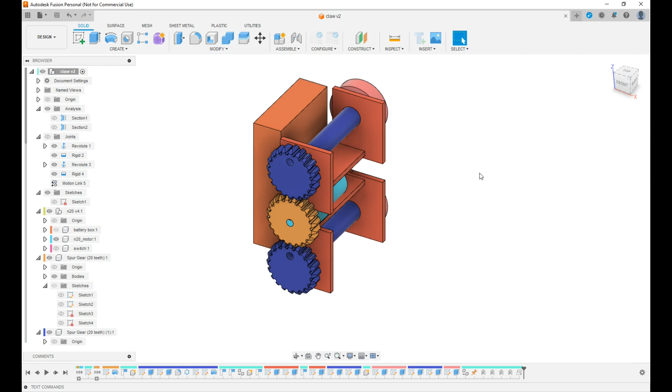This is the second video on building this clawfoot walker, designing it in Fusion. Here's where we ended up last time. I'm going to start building the legs now. We'll do them on this front side. I'm going to make a new component and call it leg.

Not sure if it's a left or right one yet. We'll create a sketch on the face of this gear. Let's project in and see. I want that hole for sure, and this hole down here.

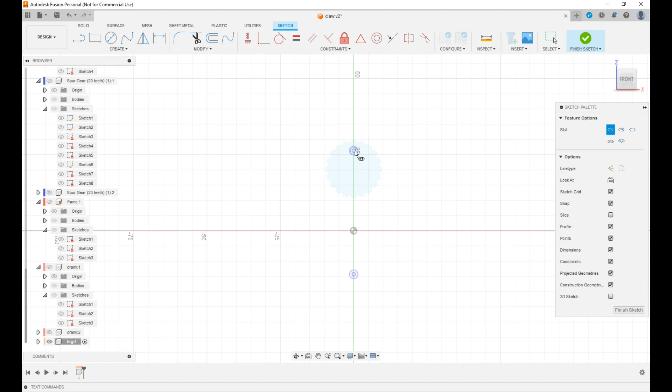Now I'm going to isolate it for now. We will draw a... that's not what I want. Let's create a slot. We'll make it a center to center slot. This is just an easy way of making a rounded thing.

We'll dimension that as, I don't know, 6. Sounds good. Now we'll draw a line off that. I think maybe we'll draw the leg where it runs out this way. So let's draw a line from here down to here, down to here.

We're going to try to shift it, since the battery's going to be in the front over here. I'm going to try to shift this leg over so that the center of gravity is more lined up with it.

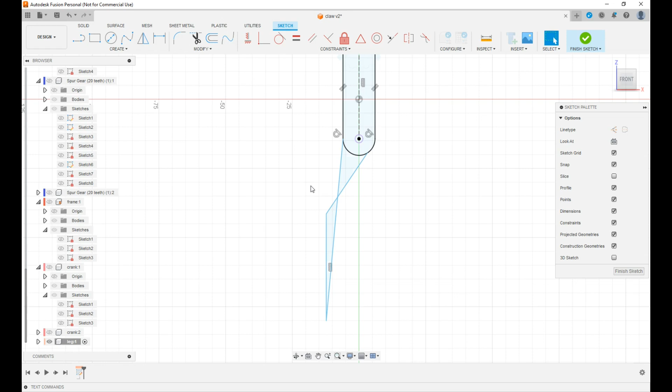I'm going to draw a line from here. Now what did I do there? Got to talking and forgot what I was doing. I'll draw a line from here to here, down to here. Let's...

Dimension those to, let's keep them the same as here. Radius is 6. So it's 12, I believe. I've got some constraints somewhere. I don't.

Let's make those tangent. I think I've got a constraint here I don't want. Let's just delete that line. Start over again.

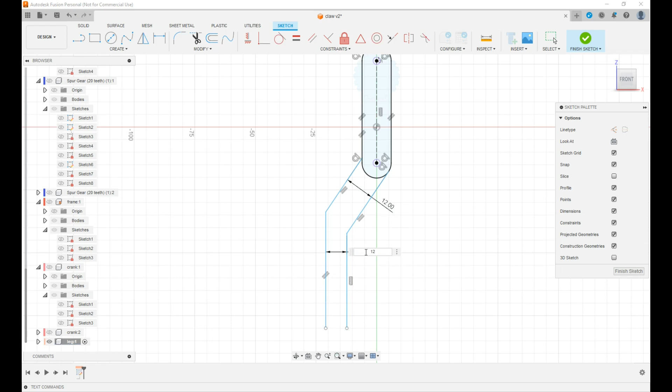Go up here, make these parallel. Haven't really thought out this geometry very well yet. Dimension this to 12. Same here. Might be a little on the big side, but we can always change that.

It's dimension from here to here, 20, 25, and this line will dimension as, I don't know, 40. We'll see what this looks like.

Close off this at the end. Perpendicular constraint from here to here. See where we're not... okay, we can set an angle from here to here. Let's make that, I don't know, 140 looks about right.

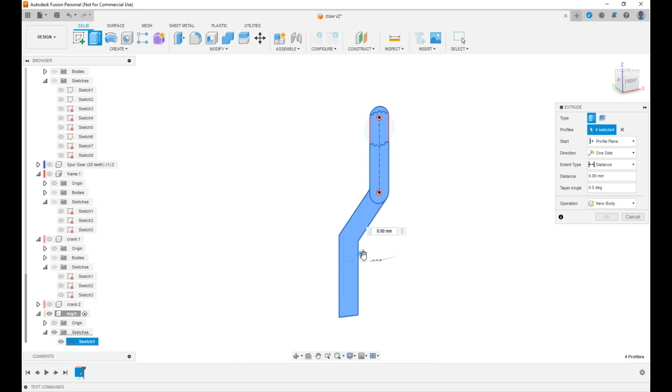Let's go over to this leg and see if the sketch is constrained. It is. So let's extrude all that, this way, I don't know, 6 millimeter. No, let's just go 5.

We can change that too later. Let's unisolate that and see what it looks like. Might have got it too far out. We can just go in here and edit that. 140.

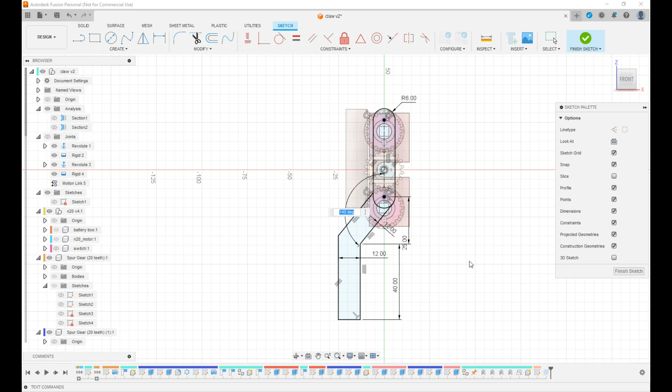Trying to decide how it's constrained. Let's make that 160 and see what it looks like. Yeah, that looks better.

Now I want this to move with this, so we're going to try to make that happen. We're up at our top level, assemble, as-built joint. We're going to make this a revolute joint, this component to this component. Snap.

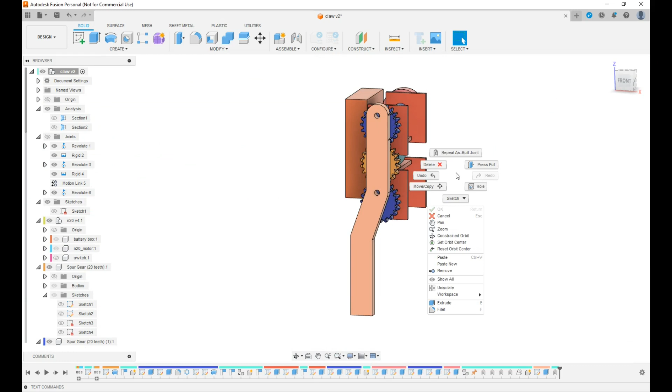That's where I want it, right there. That looks right. I'm going to repeat that, this component to this component. I'm going to try to get in there, same thing, and let's see if this works. Sometimes it does and sometimes it doesn't.

Seems to work. Let's go to joints and animate joint relationships. So that's what we're going for. That's the motion we want. Hit escape to get out of that. Revert position.

I want to make sure those stay lined up so that everything is at the end of its stroke, so I know where I can put things.

Let's make a foot for it. The reason I'm going to make them separate is in case I want to change the design of a foot, I don't have to reprint this part again, or if I want to change the design of a leg, I can just screw them together. So new component, call it a foot.

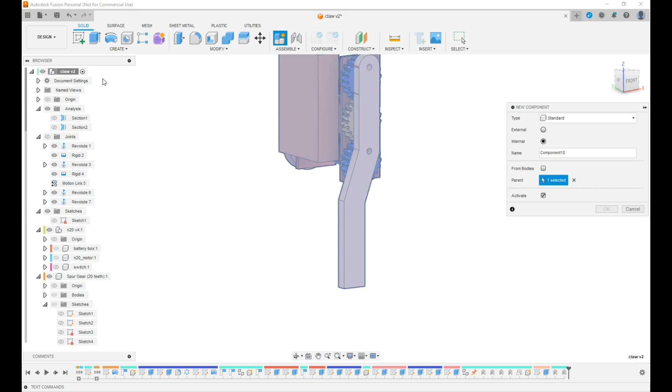We will create a sketch right here, project in that geometry. Now let's see, I want to do this. Let's just do it with lines, from here to here, to here.

Fix some of this stuff with constraints. Probably want to move that up a little. Whoa.

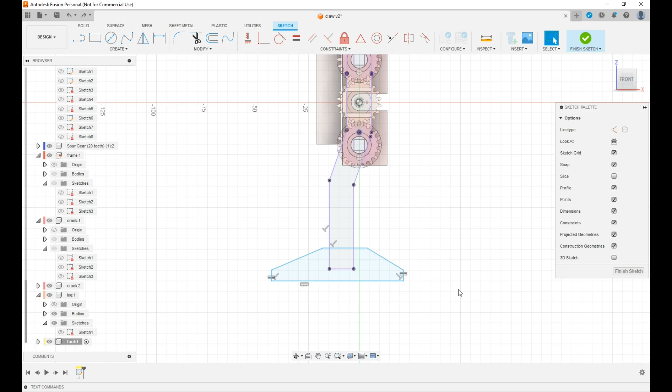I'm just kind of eyeballing it for now. We'll put some dimensions on there in a second. Let's make those two equal. Yeah, we will make... let's make these two equal too. No, that's not what I wanted to do.

We're going to make a line from here, center here, to center of here. I'm going to make that a construction line, and then we're going to make it vertical. That'll constrain that, and then we can set that to, I don't know, 3. Sounds good.

Make this 3 also. And from here to here we'll make 12. I'm just making this stuff up. Let's dimension this angle here. 135. In other words, 45.

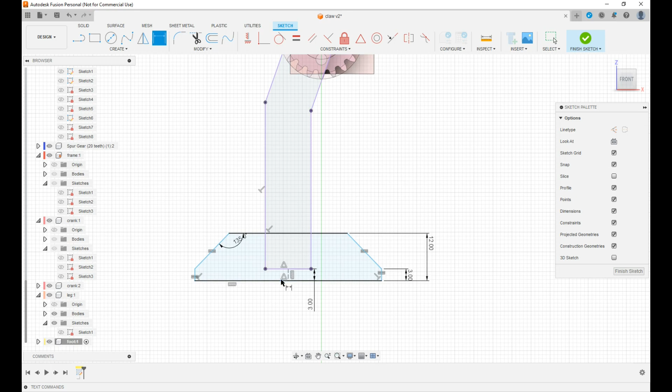What have I not got dimensioned? Probably this length here will bring it under control. 50. I'm looking at a scale over here, see if that's about what I... Yeah, let's go with 50. Can always change this, this is easy to change.

Let's go down here to our foot and see if it's constrained. It is. So first of all, let's extrude this out. Let's make it 2 millimeters and that. Okay.

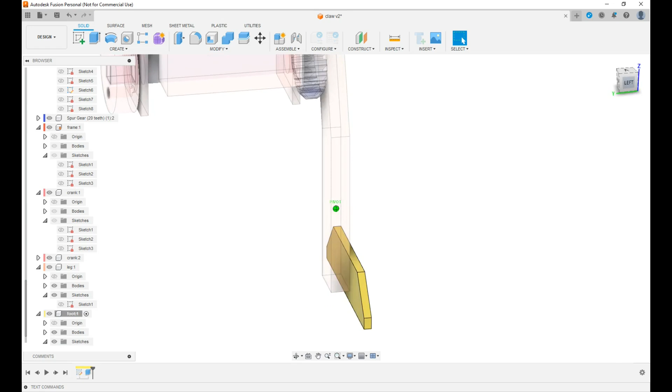Let's go into our sketch again. Let's offset this to give a little clearance. Point 2.

Turn our sketch back on. Now let's extrude this out. Distance, let's just go here, 5.2. Let's make it 5.4. Whoops, need a decimal point in there. Join.

This might be a little thick, but we'll see. Turn that sketch off, it's in the way. See.

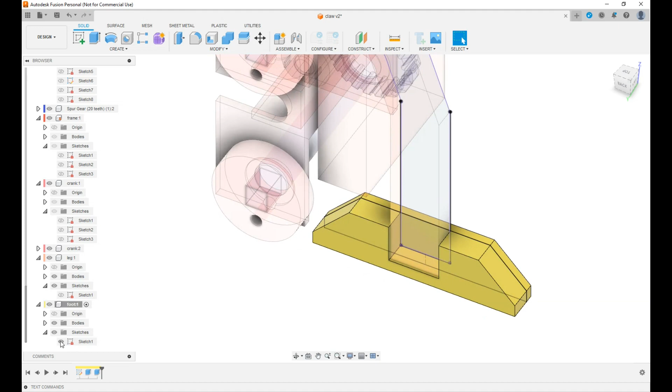So the idea is to screw this to this. So we need some holes. There's a hole in there. We'll create a sketch on there. Project in this. Do a circle.

This is going to be the through hole, so dimension this to screw clearance. Need to lock that in place.

We'll want it off the center here to here. Move a line, hit X to make it a construction line, just because we'll dimension it to 4.5. That looks reasonable. These aren't critical at all. We need to make that horizontal. Now we've got a lock. Okay.

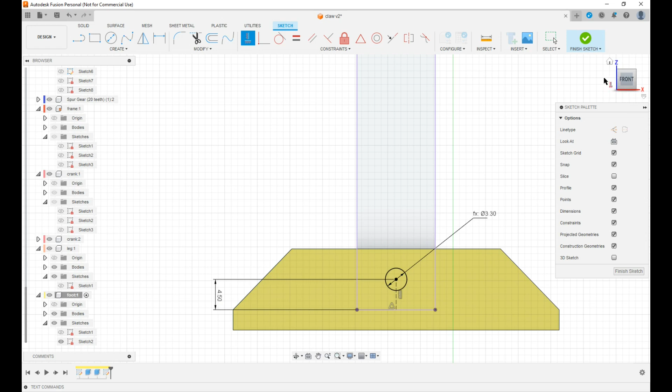Now we can extrude that hole. Distance to this object. Okay, now I want to go back up to the leg. I want to put the hole in it. Create a sketch on here.

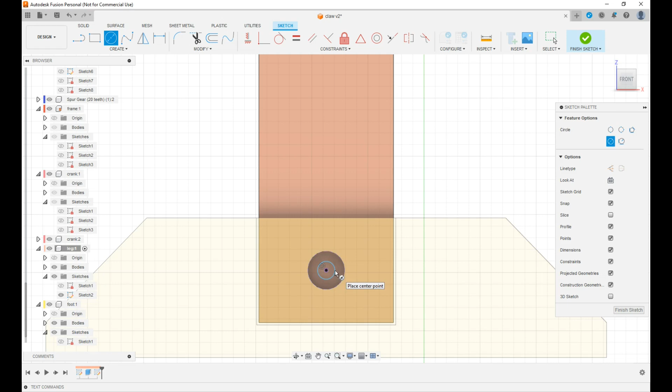Should be 2.9, and it is. Extrude that all the way through. We can see, make sure we're not cutting anything but our leg. Okay, let's go back up to the top.

I like to kind of look at the whole thing every once in a while, see if I'm doing anything like what I intend to do. This foot may not be big enough. We'll see.

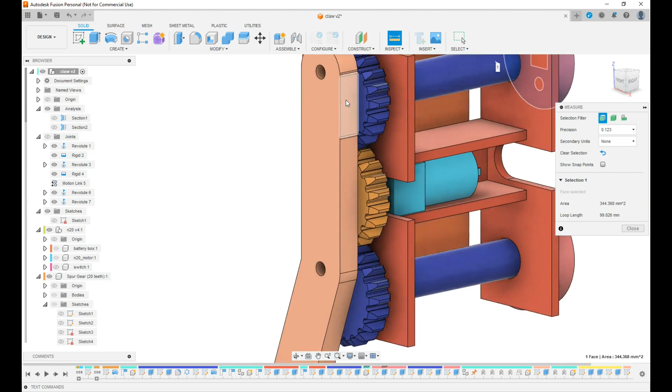Let's go back to working on our foot. Let's figure out how wide this is going to be. Inspect. From here to here. What in the world have I done there? From here to here, 56 millimeters. Let's go down here, activate that component, our foot component.

Create a sketch here. We're going to make the little things that stick out and extend over past the middle, projecting this geometry. Let's just make them square for now. A line from here and then down to here. Same over here.

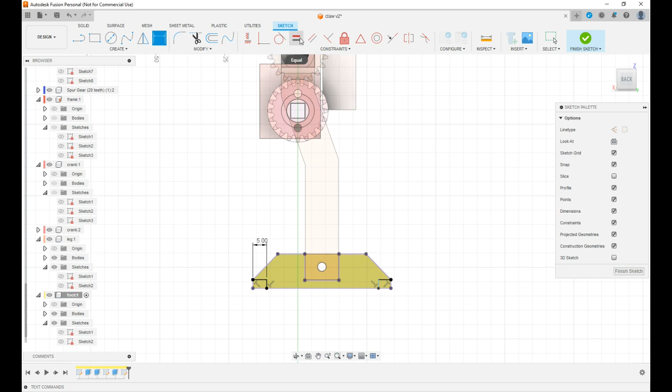I don't think these are big enough, but we'll see. Let's make it 6. No, make it 5. And we'll make this one equal to this one. Alright, now we're going to extrude.

I've already forgot how wide it was. Let's just do it this way. Somewhere over here past center. Yeah, let's make that 37. And 38. No, 36.

Let's see what this all looks like now. Let's tie this to the leg. So let's assemble as built joint, rigid, this component to this component. Now let's go up to our, and animate our joint and see what it looks like.

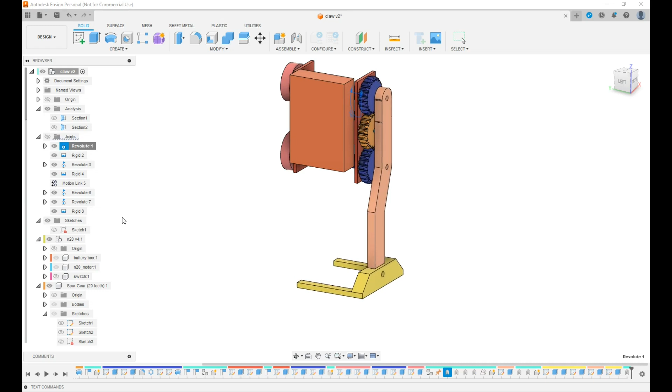Well, we'll see. Hit escape. Now we need to make copies of these for this side so we can see if they're overlapping and hitting.

Now, this one's flat on both sides, so we could just make an exact copy of it and move it over here and it would work just fine. We're going to have to mirror this one though, and that creates some problems I'll talk about in a second. But if this is flat and if we just move this over to this side, it'll work. If we mirror it and we make changes to this, it's not going to reflect our mirror unless we go back in the timeline before the mirror and make the changes.

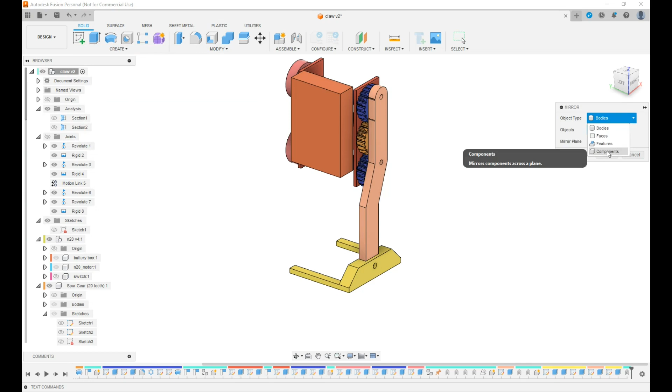So let's try that. We'll go that route anyway. Up at our top level, modify, create, mirror. We're going to mirror a component. This component, mirror plane. Now, before I do that, let's do this. Let's create a mid-plane so it'll come out in the right place. We're going to make a plane between here and here.

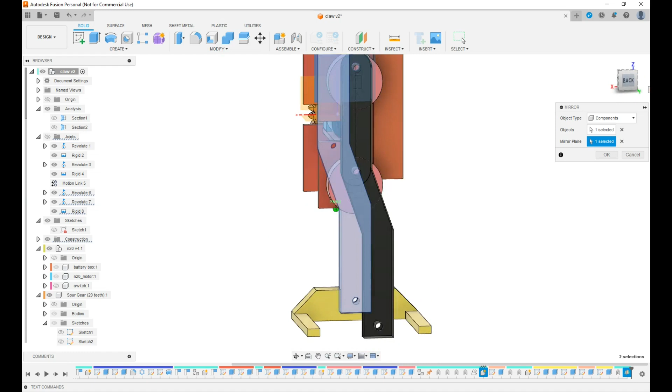Now we're going to create our mirror component. Select the object, this one, the mirror plane, that. Okay. Now we need to move this down. What is it? We need to move it down to our stroke times 2, 12, or just our stroke times 2 so it'll line up with those holes. So let's try to do that. This right here.

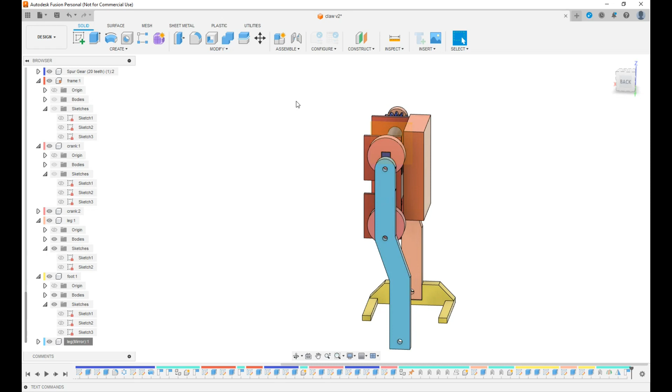Move copy. We don't want to copy, we just want to translate straight down 12 millimeters. Hopefully that'll work. We'll know here in a second. Capture position. Now I want to make a joint between this and these two cranks or joints. Assemble as built joint. This to this. Revolute. Snap. Right there. That looks right. Repeat, this to this. Here. That looks right.

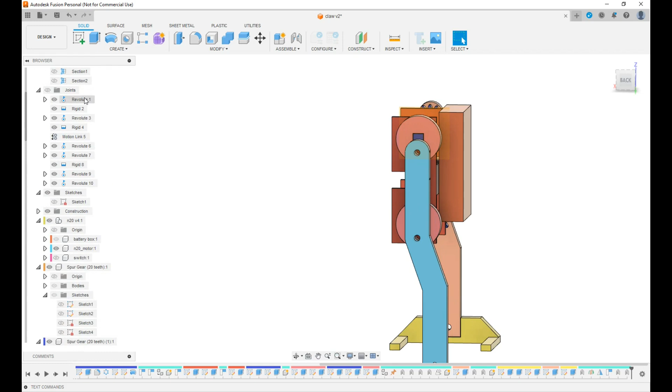Here's a moment of truth. Is it going to lock up on us? Nope. Revert position. Let's go back up here to the top to our joints and animate the joint relationships. So far, so good. Hit escape to stop that. Now we're going to mirror this. We're going to have to do, we'll try it.

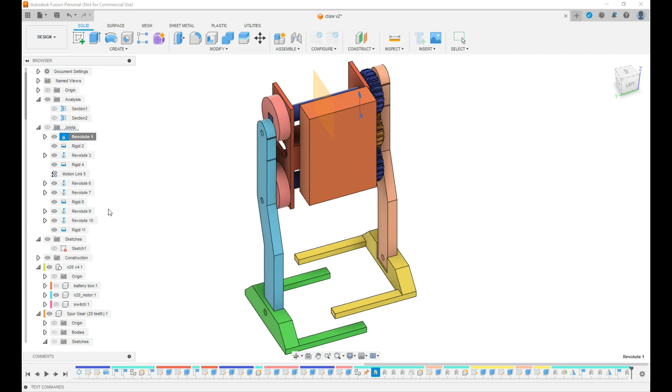Create mirror components, select the object, that foot, select the mirror plane, that mid plane we just did. Now I think if I move this down the same as I did the other, 12, it'll line up right. Hope. Move copy, translate, 12. We'll capture that position. Now we'll create an assemble as built joint, rigid, this one to this one. Now we'll go up and animate joint relationships. I think we're clearing. That would be good. Could even make things bigger.

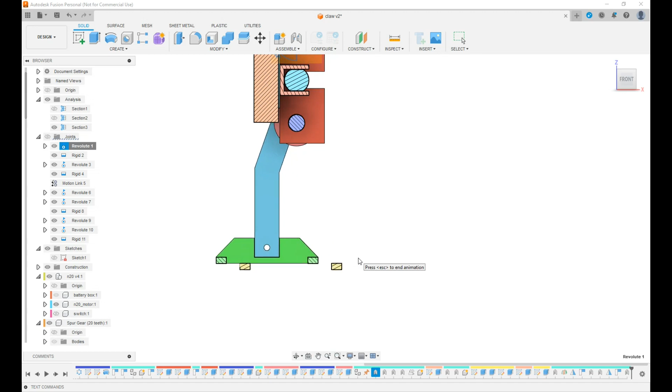If you really want to know, we can inspect section analysis and run that in like that. Okay. Now we can animate that joint. We can see them rotating around each other. Looks like we have plenty of clearance. These posts are what we're worried about. Could make them bigger, which would probably be a good thing. Try doing that.

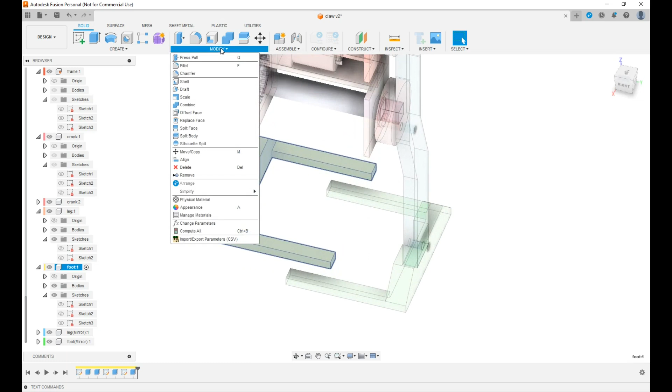Now, unlike these gears up here that are just copies of one another, this one and this one, because we used a mirror to create these, if I go in and change this, it's not going to reflect on this one, or it never has in the past. We'll try it, see. See, it's this one that I created first. Go down here and let's make a slight change and see what happens. I don't know, let's put a chamfer on it. That's an easy thing to change. Let's just put this chamfer on here.

Okay. Go back up to the top. Make sure we're at the end of our timeline, and you can see this did not reflect onto this one. That's really not what we want in this case, because they're going to be identical, just mirrors. So let's undo that. Control Z or whatever. What we need to do is move the timeline back before we did the mirror, and then edit it. So, see, here's the mirror where we mirrored it. This is a component right there.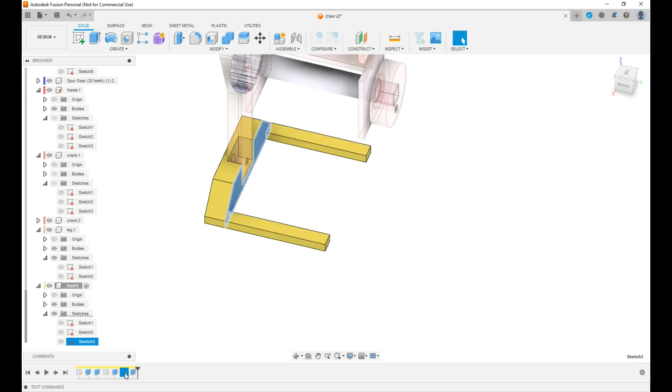So, what's this? Extrude, where we did that. Let's right click, roll history marker to here. Now let's activate that component. This one. You can see the other one's not showing up because it's in the timeline. It hasn't been created yet. Kind of a back to the future thing. Now let's make those bigger. Let's make them 6. How thick were they? 3mm by 6mm. Yeah, that'll work.

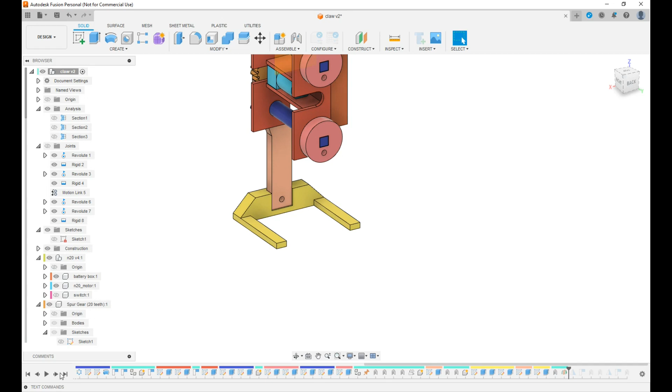Now, if we get out of here, go back up to the top. I'll try to do this so that it makes sense, because it took me a long time to figure out what was going on as far as this stuff goes. I'll just play this back one at a time. See, joint, mirror plane. That's where we created our mirror, right there. So we were before that. So hopefully these are going to be the same length, 6 and 6. Yeah, that worked. Gets confusing.

Let's animate that again, just for fun. Oh, I wanted to turn on my section analysis, so I can make sure we're not interfering.

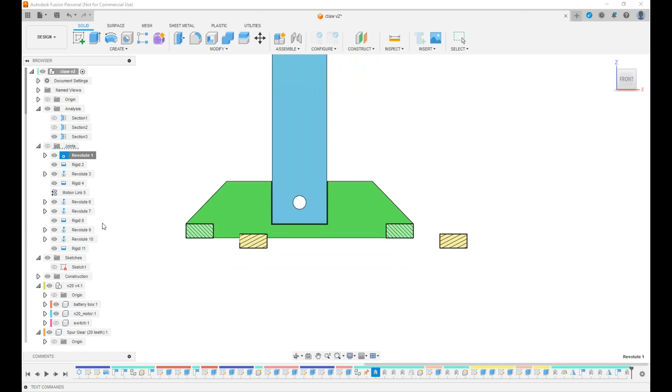That looks good. So that's the basis of what we're doing. I have a basic idea of what we're doing here: these clawfoots, making these revolve around each other. Turn off that section analysis. Now I want to get something I can actually print.

So what we need to do, we need a way of holding that motor in. So to finish this part of it, we want to make a motor mount clamp or something to hold that motor down, and a way of mounting this battery, and a switch. I want to do those 3 things. This is 27 minutes in.

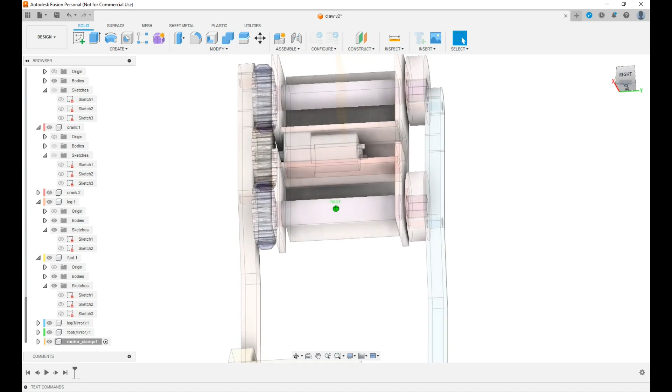So let's go up here. New component. Let's call it motor clamp. I want to do this. I think I'll do it the way I did it on my last one. I'll just make a little thing that pops down from the top and gets screwed through here. It just holds it that way. We will try that.

So, first of all, let's go back up out of that component. We want to extend these walls up, so we got a little place for our clamp to feed down into, and then we'll put holes in the side of those walls to hold it in. So what's that? Yeah, that's for construction for a mirror. I'll turn that off. Gets kind of confusing.

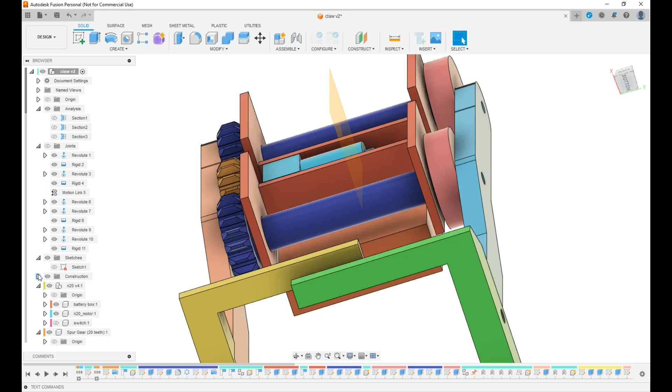There's many ways to do this in Fusion. We can go back in our timeline to the sketch we created this with, or we can just grab these up right now and extrude them up to here. So let's get them back into our frame. I'm just going to do the easy thing. Extrude. We're going to extrude distance to object. Actually, don't really need to go that far though. So let's just go distance. We know that's 7.8 millimeters.

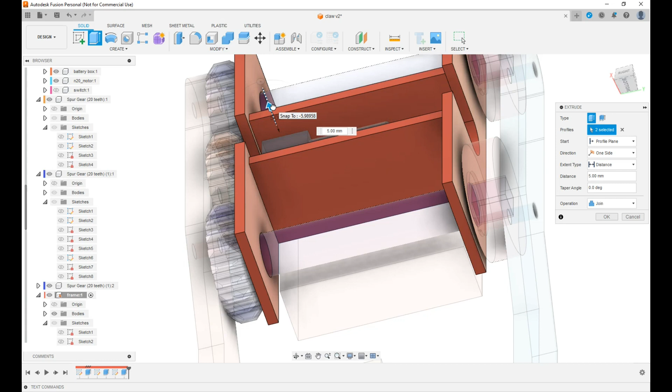Let's just go 5 millimeters. We'll leave it down a little bit. I think we can still get our screws in there. Okay. Let's isolate that frame. I want to make some holes through there. I want to bring that motor back in though. I'm going to make some holes in here for some screws to go through. Right here. Create a sketch on that. Don't like the way that looks.

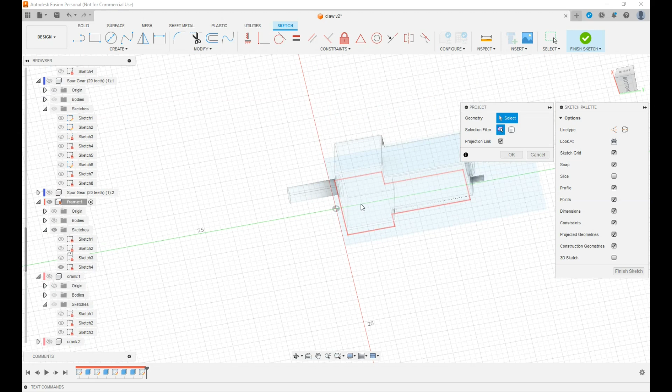We're going to project in, let's see, that side of that motor. Turn off this body. I'll project that in. Bring the body back. That'll work. Now we're going to put 2 screws right here. I'm going to project in this geometry too. Just put a couple of circles here. Dimension them to be, these are going to be through clearance. They're going to be equal.

I'm going to dimension them from. Now let's do it different. We'll select them both. Make them horizontal vertical to one another. From here we're going to dimension. May have to move that wall up a little more. Let's make them 3. We will do that in a minute.

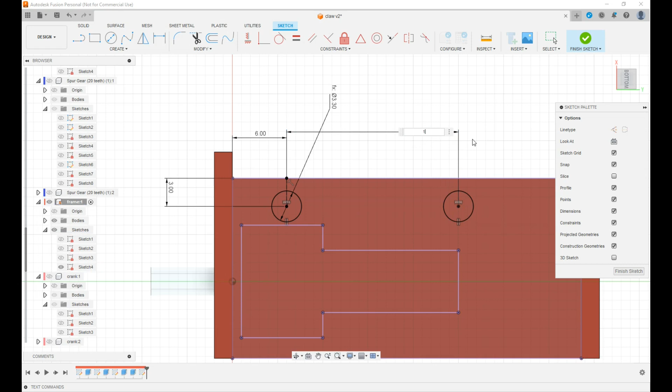We'll dimension them from this edge right here, and from here to here. 6 sounds good. And we'll just dimension them from one another. Let's make that 8. No, let's make it 16. Yeah. Okay. Now we can extrude these all the way through to the other side. Cut. Make sure we're not cutting anything but the frame. Okay.

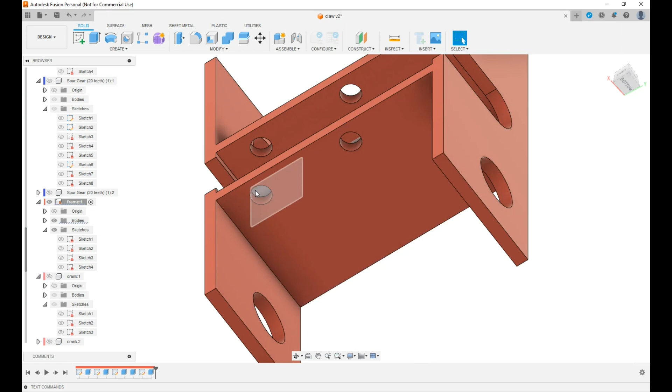Oh, I'm just going to go ahead and change this so it extrudes all the way up to here. Should have done that originally. You can see it moved. Well, the sketch didn't move, but our holes moved with those walls moving. Something looked funny. No, that's all right. So that's our holes we're going to use to hold our clamp in with. So let's go back down to the clamp.

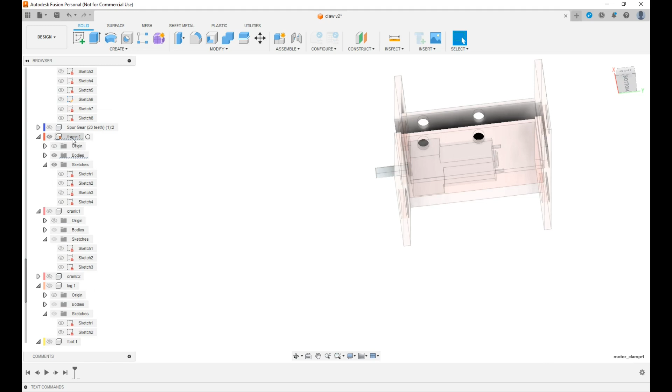Trying to decide what I got isolated. I don't want to lose track of that. The frame. And we'll go down and isolate the motor clamp. Whoops. Yeah, now I want to turn that frame back on. And the motor.

Okay. We will make a sketch on this face. We're going to slice it so we get down to there. Yeah, that might not be a good idea. We'll project in that line right there. Project. That is one end of our motor. Also want to project in. Let's project in.

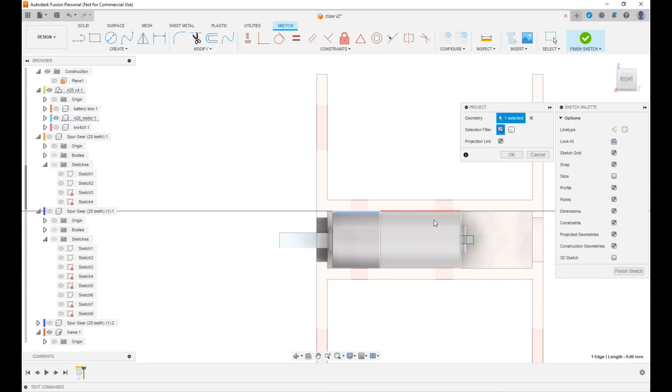That line. No, this line down here is what I really want. I want to know where the end, or this one. I want to know where the end of the motor is. That one. Now I want to slice it with my other line. Go? Oh, project that line. Now I want to slice it.

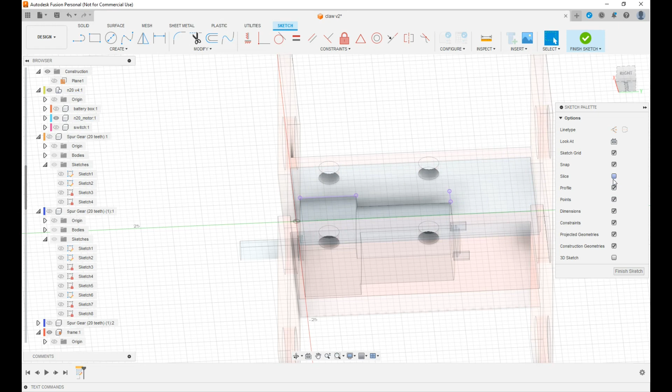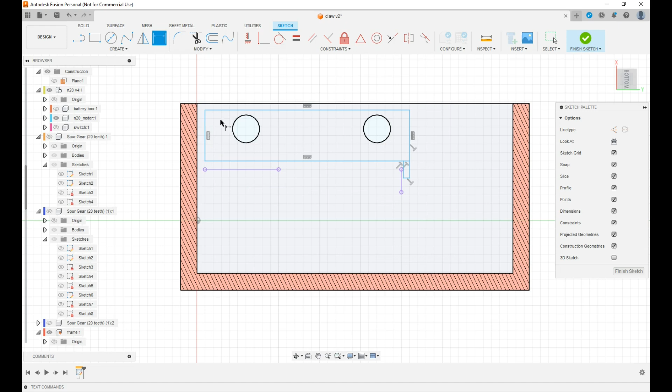Let's just make it a rectangle. From here over to here. We'll make a little lip that goes down like this. Trying to get this motor captured. Let's dimension this. Let's make it 26 long. This will be basically an offset for our clearance. So make this 0.2.

We'll dimension this from here. I don't know, 0.6 I guess. From here to here. Let's make it what we could do. Delete that dimension. Let's project in this line here. And just make those coincident. That didn't work. Well, we'll make this point and this point horizontal, vertical. That'll work.

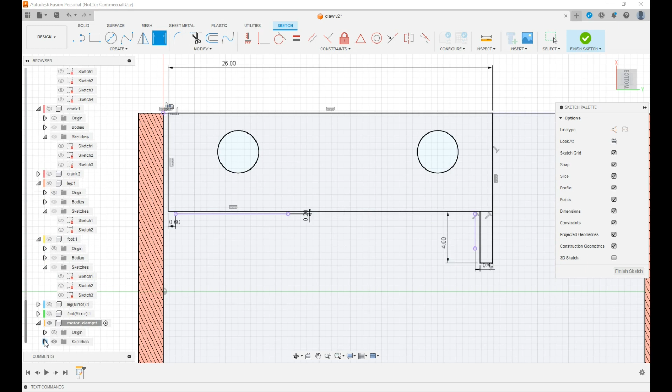Dimension from here to here. Let's make that 0.4. Give a little slop. And this line here, I don't know, 4. We'll see what this looks like in just a minute. See where we're at on our sketch. It's fully constrained. Finish sketch. Let's extrude it from there.

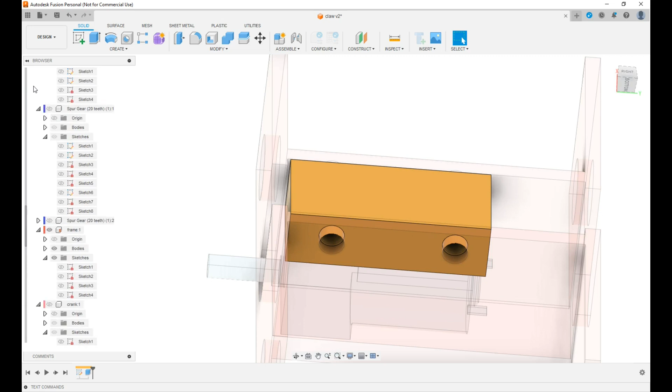We can go to object, pick that object, just use an offset, minus 0.4. This doesn't have to be tight. New body, okay. Now we got a block. We'll take some of that plastic out of there in a minute. Let's see what this looks like. I think I'm going in the right direction, but I could be wrong. I'm making this all up as I go. Well, my offset wasn't in the right direction. I see that.

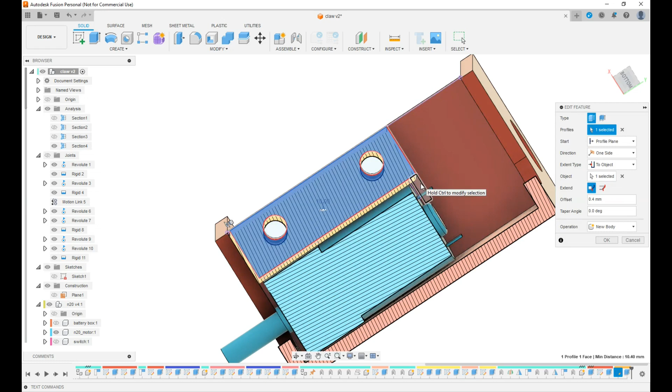Let's do a section analysis and see what that's doing. Well, let's leave that alone. Go back here to the extrude that created that. We forgot to add that in. I can see I'm interfering with my motor. I should have turned that motor 90 degrees, I see now. Oh well. We'll edit that sketch.

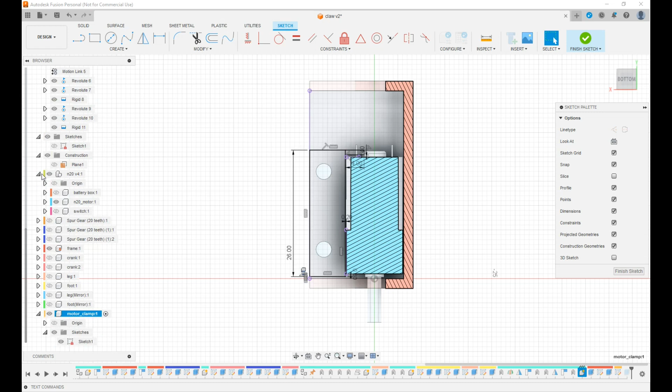Sometimes it's hard to get a sketch dimension. Some of that stuff interfering. Let's see, what am I working on? Let's turn off that. Got too many things going on here. Need to close some of these down. I'm going to turn off that motor, I think, so I can edit that sketch, make it 2. Now I want to bring my motor back. I think that'll work.

What you can do when you're having trouble like that, go down here, do your sketch. If I can get to it, right click, show dimension. Well, that's not what I wanted to do. Usually you can get in there and edit that dimension then. Well, let's turn the motor off. Now we can do it. Now you can double click on the dimension, change it to 1.6. Okay.

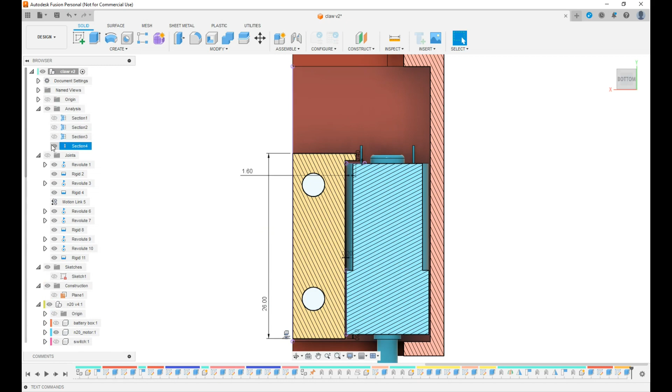I think I'm about to get lost here. Let's turn off that section. Well, let's look at it closer. What's that dimension? 1.65. Those holes are too big. Let's go back into our motor clamp. Turn off that motor. Turn off the frame. Edit the sketch. Oh, I didn't put those into a sketch. That's why. Let's bring the frame back up and project in those holes.

My dog's barking at something.

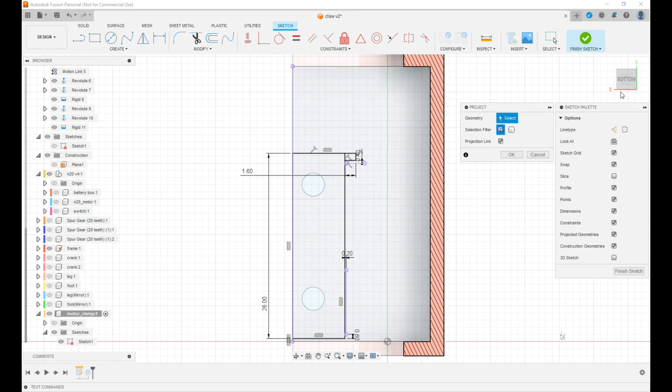For some reason that didn't work. Trying to project in those holes. I think it's actually my sketch that's in the way. There we go. Now I want to make them construction. Circle. Now I know you can use the hole command for this, but I'm just not used to it. Dimension these to screw. These are going to be what it threads into. 2.9, enter, and we'll make them equal.

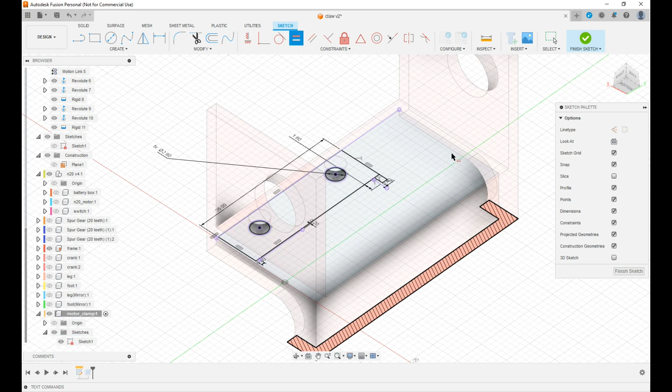Now I'll go back to my extrude. What am I extruding? This. I think I'm picking up the profile off the frame when I do that. Is the frame still on? Yeah. Alright. Let's try this. Get rid of all those.

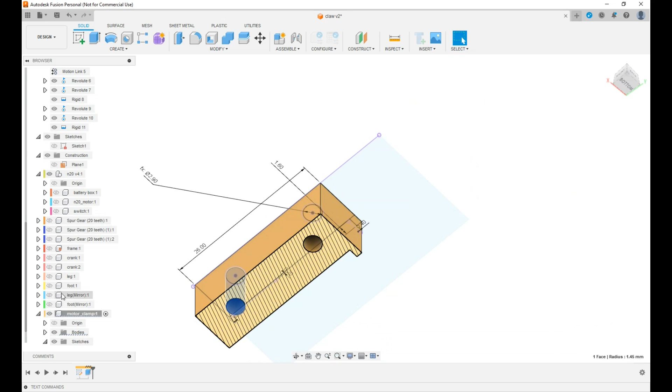But it's still the wrong size. What am I doing here? Sometimes selecting things can be a challenge. Now we're right size, 1.45. Well, that didn't go too smoothly. I'll go down and turn that sketch and hide dimensions, and turn the sketch off so it's not showing up.

So where's our motor? So there's our motor. There's our little block that's going to clamp down on it. That was way more trouble than I thought it was going to be. Let's turn off the sketch, or I mean the section analysis. So there it is. So we're going to run screws through here and they'll thread into this and hold that block in place, and that'll clamp the motor down.

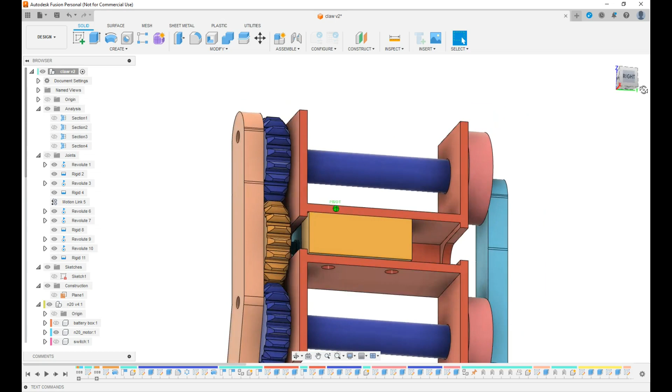It could be better constrained. If the motor had set back a little more, I could have put a lip on this end, and that would have kept it from sliding a little bit. But I think this will work. If nothing else, we could go in there and just make the frame so it can't slide. That can be modified later.

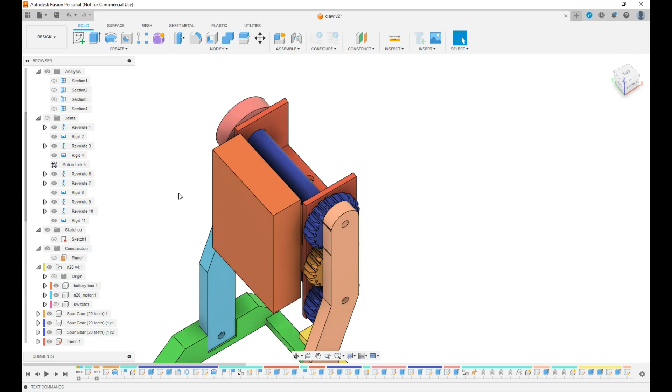Okay, now we got to put a place for the battery and the switch. Where's the battery at? Battery box. To that, we're just going to put a plate on here, and I'll double side tape it for now. So, frame. I'm going to isolate it. Create a sketch on it. Project all that in. And we'll just draw some lines to close it up.

And extrude, does it matter which way I extrude it? We'll go out for now. Only like 1.6, doesn't have to be very thick. This will be the side it'll print from. Now where am I going to put the switch?

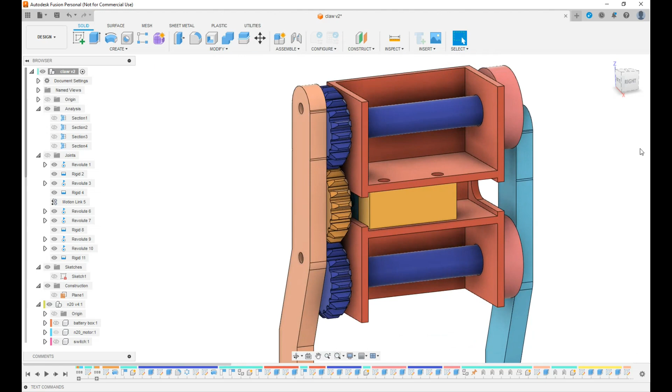Our battery's going to be over here. I need to move it a little, but that's irrelevant. Just put the switch right here. I can make a mount. I believe it'll fit right in there. Don't think that'll be a problem. So we'll put the switch where it sticks out the other side from here. Let's go back into our frame. Let's isolate it. Where's the switch at?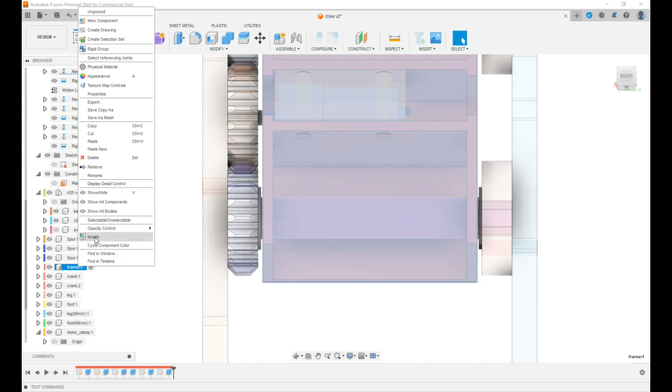Let's see if we can't move it into place. So, move copy. No, we want to be at the top level before we do any move copying. I don't know if it matters or not, but I want to be there. Move copy. First thing I want to do, we'll do a free move. We're just going to rotate it 90 degrees.

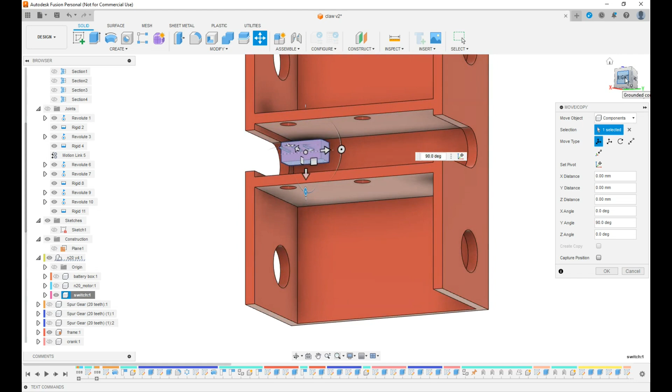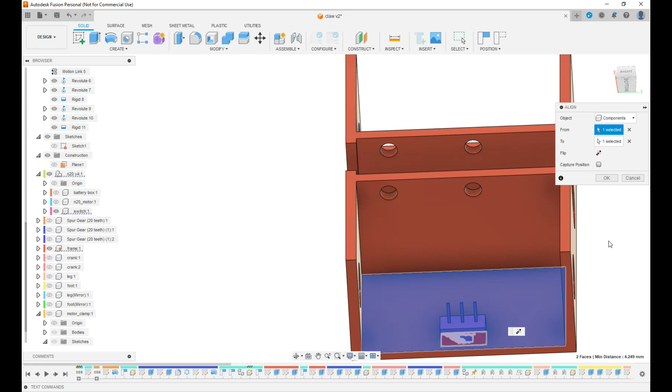Okay. Now we're going to translation. I think this is the down side. Yeah, that's down. We'll put it right smack dab in the middle. We're pretty close to it. That's close enough. I'll try to use the align tool. I hardly ever use it. To put this face on this face. Did that work? Yeah. Okay.

Now I can check to see if we're on center. Let's go ahead and do that. It'll bug me if I don't. We'll measure from here to here, and from here to here. 15. I've already forgot my overall dimension. It's getting late. Yeah, we're the same. So that's where our switch is going to be.

So let's activate the frame. Create a sketch there. I want to capture position for sure. Now we're going to project in. P for project. Those lines. I'm going to hide that switch for a minute, I think. Offset that by chain selection. Offset it by minus 0.2. I think that'll work.

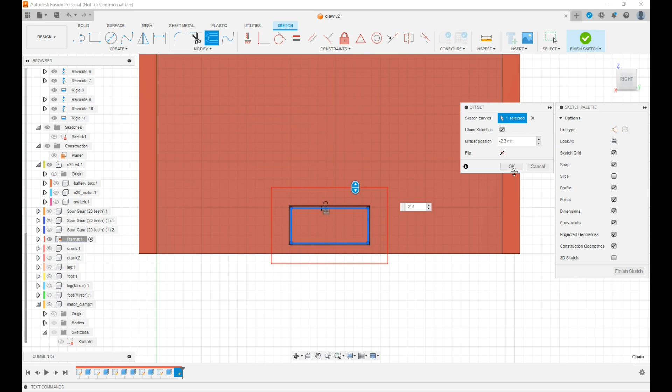Now we're going to offset again, by minus 2.2. Make little walls that are 2 millimeters thick. That's alright. Finish sketch. Guess I got it too close to the edge. Extrude. It's alright. Let's bring that switch back up. See how far I want to extrude it. Four. Sounds good.

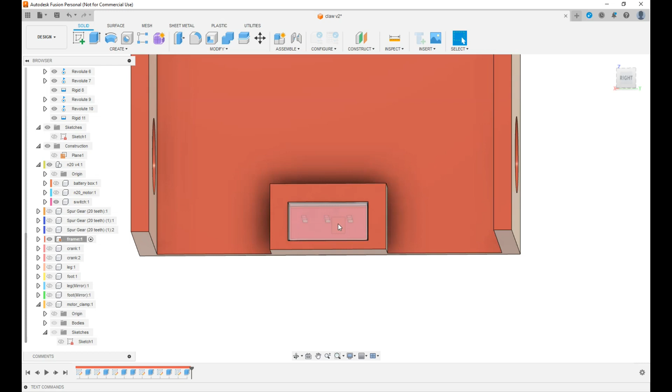Okay, now I want to, my switch. Go down here, create a sketch. I want to make clearance for the little knob on the switch to go through. Project this in. Line. This is so I can find the center, which is the way I do it. There's more than one way of doing it for sure.

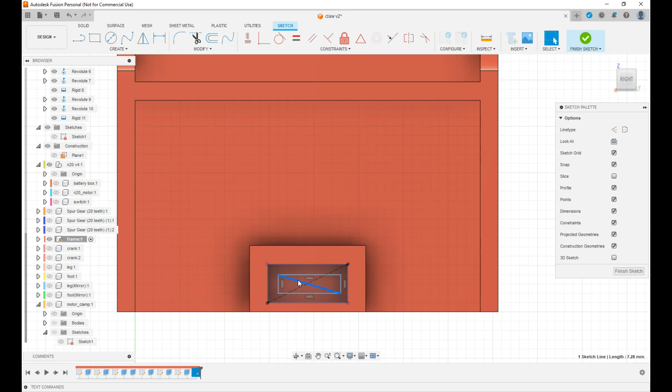X. Now I want to do a rectangle. A line on it, go in the opposite direction. X to make it construction. Now I want to midpoint that to that. That should put them in the center. Now I just need to dimension this. Down there where I can see it. And I've got the switch over here.

Let's see how much slide it's got. Can't remember what I normally use. 4. We'll dimension this. I think 2. I want to get a little. Let's make it 2.5. No need in getting too close. Now we're going to extrude that.

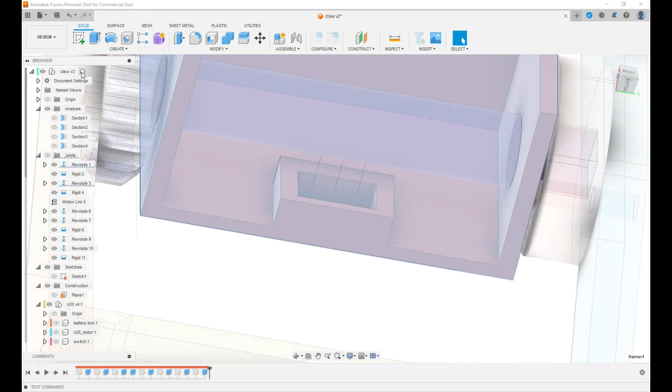To the bottom. And isolate it. Bring that switch back in. Okay, where are we at here? We got our switch, place for our battery. Battery.

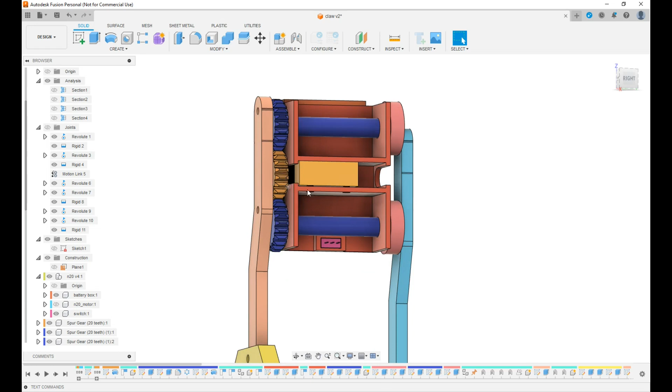Got it all moving. Can you print it? This should be able to print no problem flat on the bed. This can print with this on the bed. These can print with this end on the bed. The gears, no problem. That gear, no problem printing. The cranks will print. The legs will print. And the feet can be printed just the way they look right there.

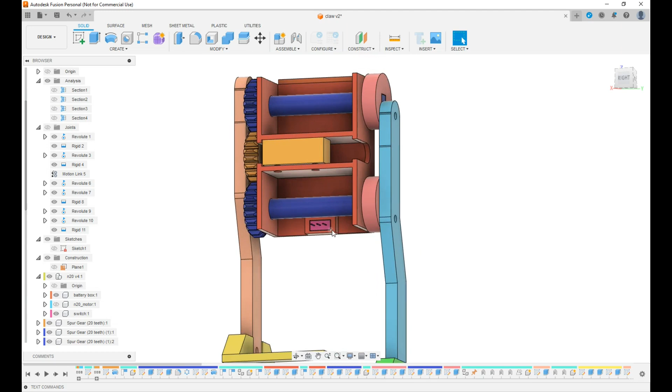First, make sure we're at the end of our timeline. At the top of our tree and at the end of our timeline. Animate the joint relationships. The direction is irrelevant, backward or forward. That's just going to be how we wire our motor up.

I bet this thing will print on that Bambu Lab Mini, probably the whole thing in a couple of hours. So I believe that's where I'm going to leave it. I'm going to print it and show if it worked or not. That'll be interesting. Can't see anything I've done wrong. If I've done something wrong, I won't just fix it and pretend I didn't do it wrong. I'll show you. So let's save this. We'll save this as claw walker p2. That way if I have to come back to this spot, I can.

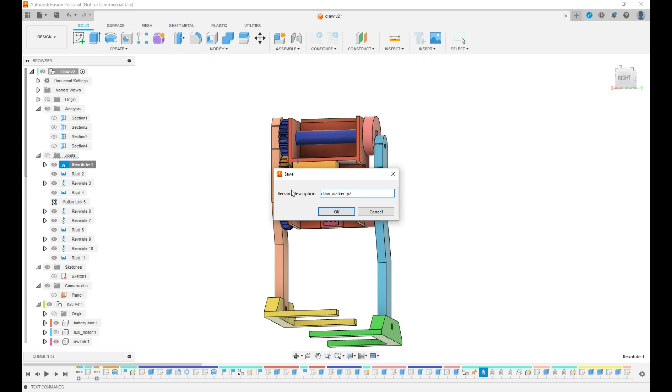You can always go back to different versions on this software. I mean, not the software versions. You can go back to different versions of your design in case you screw something up and you realize that you made a mistake many times back, and that's a handy thing to have. Okay, we got it saved. I'm going to call the video quits here. The next thing we'll see is if it printed and if it's working or not. Thanks for watching. Or no, I'll probably tag the print onto the end of this video.

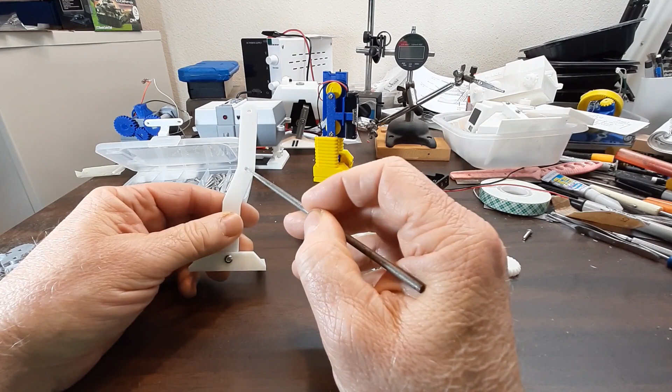Well, I've got the parts off the printer, and here's the results. We made a couple of mistakes, for sure. These holes are too small. I think I just used the projections from the threaded hole in there, so these need to be moved out to like 3.3 millimeter. I drilled these two out to see if it would work. And the shafts, I think these turned out fine.

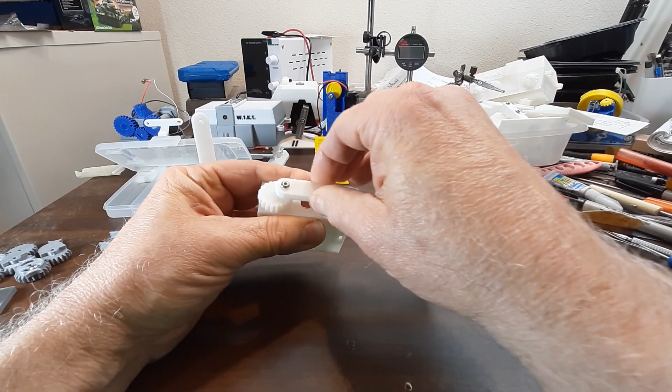These have to be kept in time or they act funny. If they were captured, it would be all right. But this will all loosen up. So that's okay. The motor, this little motor clamp, I believe that will hold the motor in. I'm not too happy with the amount of clearance I have. Hopefully that's visible. Right here, I may do some modifications on this motor clamp.

What else do I need? See, well, mostly that's it. So not too bad. We'll make the changes and print up. Just have to reprint these parts and the legs again. The foot fit on the leg just fine. So that's what we're going to change in the next video.